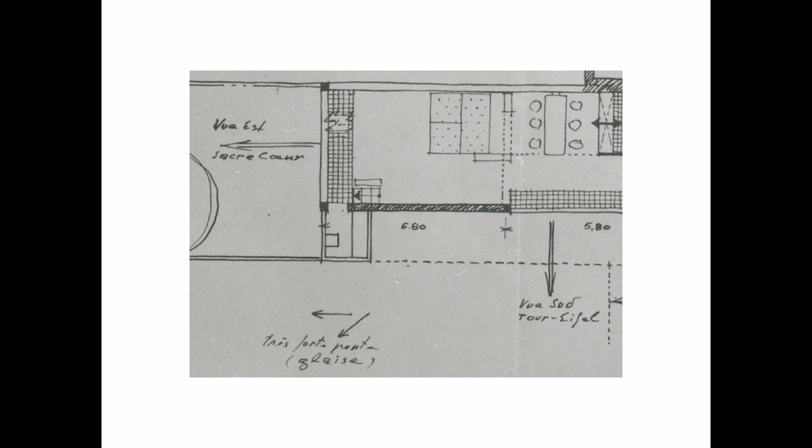The Maison Zilvelli was oriented, as indicated on the simple hand-drawn plan, to two other major Parisian tourist attractions, the Eiffel Tower and Sacré-Cœur, the latter to the left and the former lower right. Both are miles distant from the house and suggest how Jean Welz imaginatively made the most of the long, thin site, perched on the edge of an unstable hill, which was opened for housing in 1927, having the tape cut by Josephine Baker, and where Zilvelli would be built 6 years later in 1933.

The mad hair person at the back is Jean Welz. That short period from 1927 to 33 was effectively the length of Jean Welz's career in Paris. Zilvelli was to be his last major design to be built, the climax, as it were, of a highly intensive period that only began right at the end of 1927, in the December of that year, when he was appointed chef de cabinet, or chief architect, to Raymond Fischer, the architect whose name appears in the local town hall as the architect of the Maison Zilvelli, for the important and generous reason that Welz was not registered as an architect in France and worked on the black, as what Fischer called a nègre viennois, a ghostwriter.

That fact accounts in part for Welz's anonymity, which only really came home to me when I met up in Paris with the expert in interwar Austrian and German modernism, the late Iris Meder, who had written on every nook and cranny of the architects of the interwar period, but knew nothing of Jean Welz and was simply, quote, amazed, unquote, by Zilvelli and his other key houses, and simply couldn't understand how she had not really come across him before. I'm afraid I'd stolen her researcher's dream.

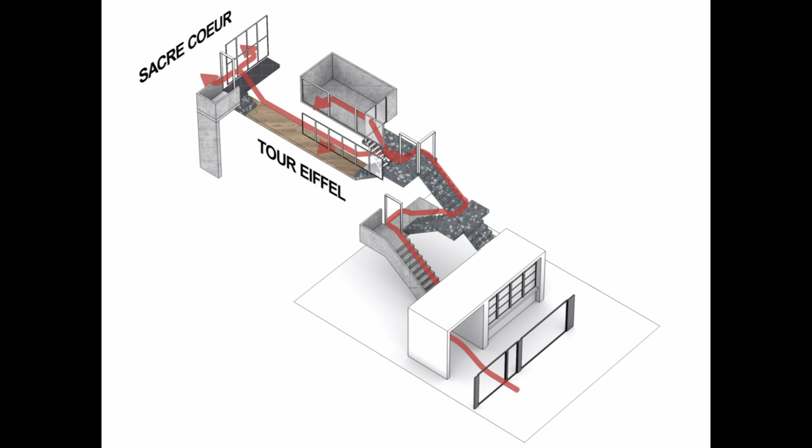But Welz arguably succeeded in taking these principles further than the master, in the banishing of ornament and the creation of a highly varied promenade architecturale, as Le Corbusier called the path from the street to the roof of a house, and which Raymond Fischer called Le Chemin Aérien, or the aerial way, his translation from visiting Loos's architectural school in the early 1920s in Vienna, his translation of what would be later christened the Raumplan. Now, Fischer's version seems to be a more appropriately visual term for the winding path Welz created in Zilvelli, a theme he had taken up with a vengeance in his first house for Fischer, the Maison Dubin of 1927-8, a house literally joined on to one of the classics of modernism, the Maison Cook, in which Le Corbusier announced the 5 points of modern architecture that would become the commandments of young architects for generations to come.

Imagine Jean Welz, aged 27, being given his first opportunity to design a modern house. He had designed a traditional house for Josef Hoffmann, who was his professor and then his employer from October 1918 to September 1925. But this design was to be alongside Le Corbusier's house, itself flanked by a Mallet-Stevens house. Welz had worked for Mallet-Stevens briefly in 1925. And this was indeed a remarkable terrace of just 3 houses just beyond the walls of Paris. So Welz visited Corbusier to ask if he wished him to carry on the roofline established by the Maison Cook. Corbu told the young Welz it was his design and he should do as he liked. Welz rather took that advice to heart.

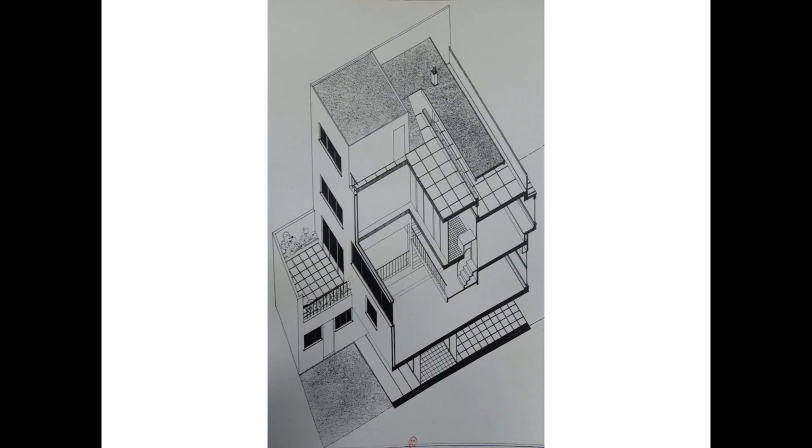In the Maison Dubin, I believe that Jean Welz began a quite remarkable journey in which he brought the full force of Vienna to bear upon modernist Paris, in what I see as a rigorous campaign opposing the 5 points, with an exploration and development of the contrasting and opposing ideas of Adolf Loos. Where the contemporaneous Villa Moller by Loos had 6 levels, a late version of Loos's cubism in moving rooms up and down within the outer 4 walls, depending on their significance, and linked by short flights of steps, the 3 steps up, 3 steps down of Loos, the Maison Dubin had 9 levels and 15 rooms, compared to the 3 levels and 6 rooms of the Maison Cook next door. In Welz's first modern design, he went Loos with a vengeance.

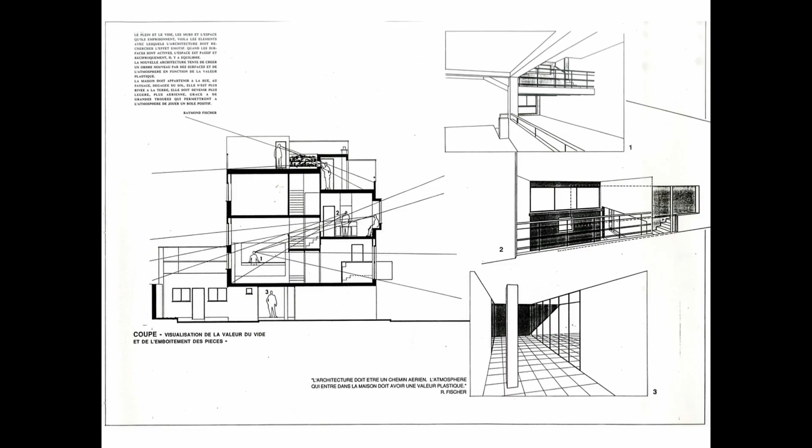Raymond Fischer was so impressed by Jean Welz, to whom he was probably introduced by Adolf Loos himself, that he gave Welz a signed photo, thanking him for his collaboration on the design. The Maison Dubin has none of the 5 points, barring a roof terrace, in fact 3 roof terraces, outdoing Corbusier even on the roof. The small cubic balcony on the front facade, Welz told his son, was a theme as in music, which he repeated and varied throughout the house.

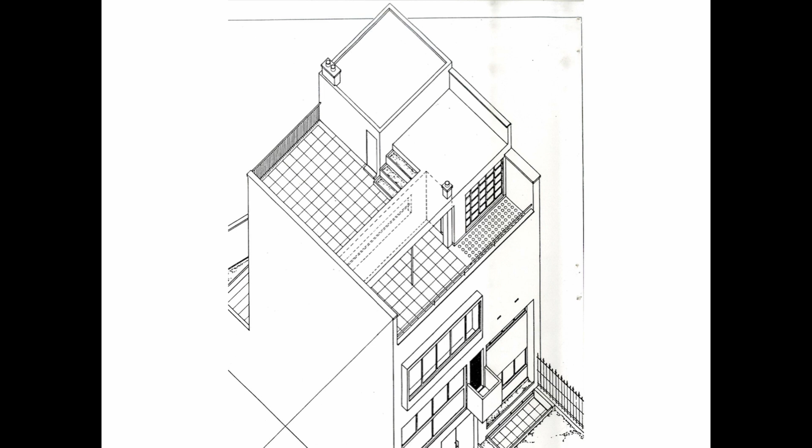Now, little or nothing has been written about the Maison Dubin, perhaps because the small Paris avant-garde knew or suspected that Raymond Fischer was not the real designer, despite the plaque still in the street outside that credits him. And Fischer knew everyone and was a founding patron of L'Architecture d'Aujourd'hui, the house magazine of the Paris modernists. His reputation as an architect was not too high among the cognoscenti, but it would not have been quite on to discuss Welz, the backroom boy, embarrassing for Fischer, and Welz was on the black and illegal, as it were.

Between the Maison Dubin, completed in 1928, and Welz's 2 major houses of 1932, this is the Villa Darmstädter, and 1933, Maison Zilvelli, there were over 20 projects Welz completed. But first, I will draw your attention to 2 more houses, 1 block of flats and 2 big unbuilt projects that pre-date 1933. The 2 houses are both dated 1929.

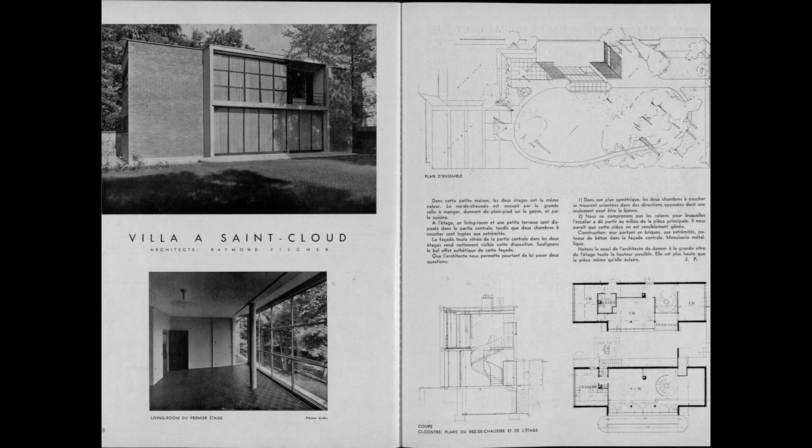First, the Villa Kolper was described as a medium-price house on a more modest budget than the Maison Dubin discussed just now, but showing a continuity with Dubin, although it's an insert between brick or stone houses. The first floor long window combines that Corbusian feature with an interior on 2 levels, à la Loos, an ingenious combination behind 1 window and combined internally with steel pillars to devise an open plan floor.

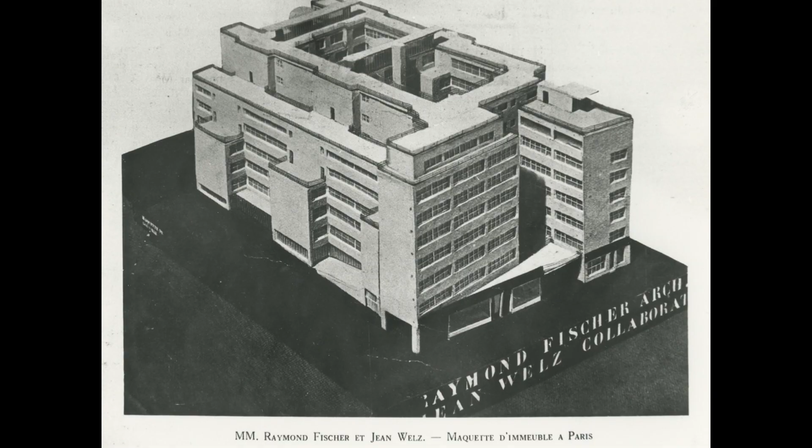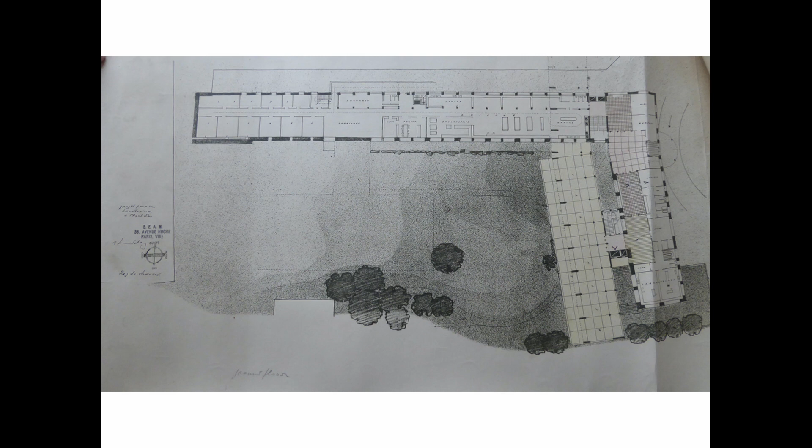Welz must have worked quite some time on the project, as the floor plans are properly detailed for both a typical floor and the ground floor layout. The exterior, to my eyes, stands up rather well to any comparison with the Aalto building and argues for Welz's ability with much larger projects than the single house.

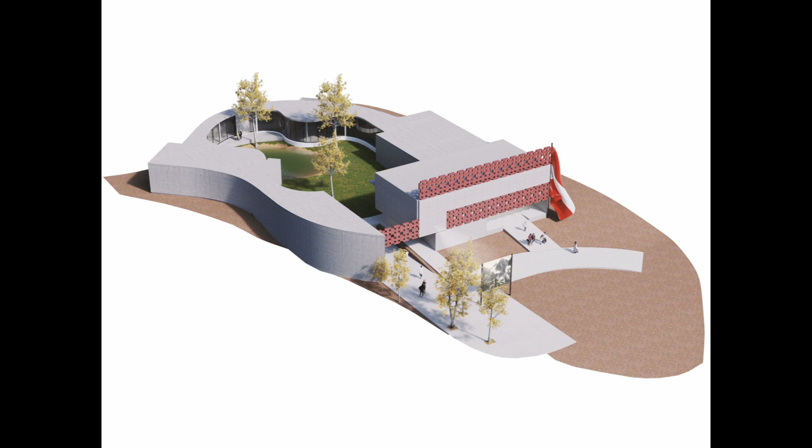The second large unbuilt project was Welz's entry for the 1937 Paris exhibition, the Austrian Pavilion proposal. On a relatively tight site, Welz created a very varied path that rises and falls in levels and turns around 180 degrees to return to the street of entry. This may have in fact been Welz's final attempt to remain in Paris, but as an unknown quantity with zero political backing in Vienna, it wasn't even shortlisted.

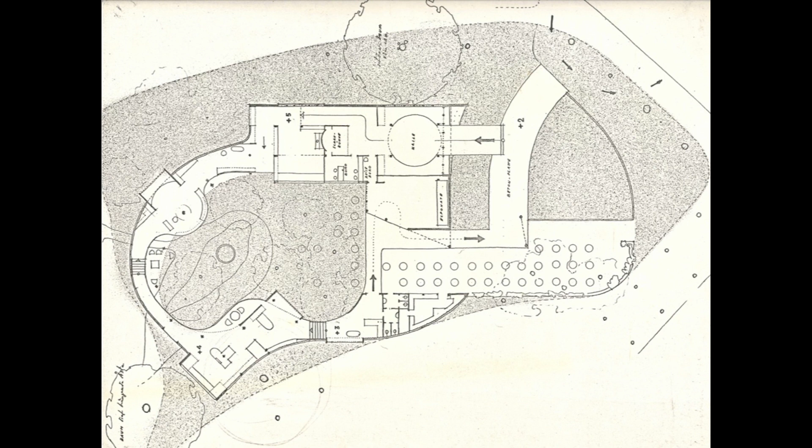None of that was Loos. It was all Jean Welz. And here his campaign against the 5 points reached a climax. Close inspection reveals that none of the 5 go without contradiction at Zilvelli.

If great art strips away, here I feel that Welz harnessed perhaps the greatest name in the history of architecture, Andrea Palladio, to create a new set of conditions upon which a modern architecture could evolve, in contrast with Corbusier's 5 points. It outdoes Palladio in the purity of the 2 flanking brick planes and in the picture frame stroke portico of the central area, with the loggia overlooking the garden and the full height glazing of the ground floor doors onto the terrace and garden behind.

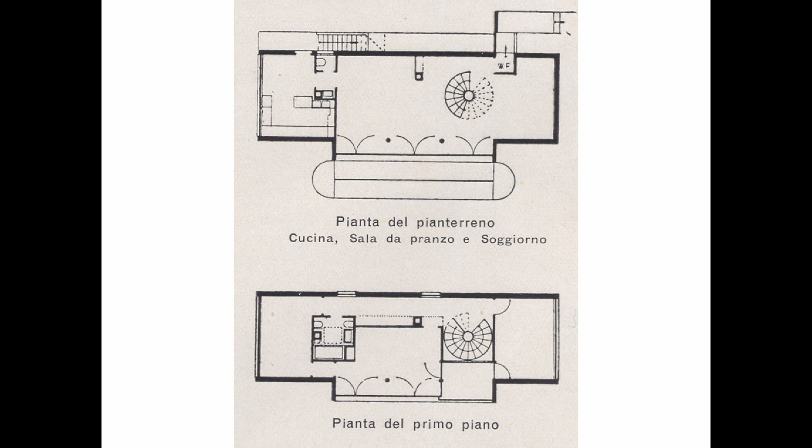But if there were to have been opening doors, the room may not have been intended to be a bedroom as it became, but possibly an open loggia overlooking the garden below. That rang bells in relation to Palladio, and a couple of his houses of the second decade with a similar feature. Here, the Villa Pisani, a portico two floors high, with an open loggia on the upper floor, in both cases rear elevations looking onto the garden.

I also rather later visited the Queen's House at Greenwich on the River Thames, the very morning it reopened for visitors in 2020. Designed by Inigo Jones and begun in 1616. Jones was a huge fan of Palladio. His copy of the Four Books of Architecture was heavily annotated, and he had gone to the extent of searching out Palladio's assistant some years after the great man's death.

It too had a rear elevation with a similar feature, the upper floor loggia overlooking a garden, in this case extending up the hill towards the Greenwich Observatory, thus providing a splendid view of the rising landscape. Inigo Jones's house was not completed until 1636, but he was credited with bringing in the Renaissance to England as a pioneer almost 300 years before the Villa Darmstädter.

This vertiginous sense of the history of architecture, extending from ancient Rome, whose architects had plundered ancient Greek architecture, to Palladio's plundering of Roman ruins in the mid-16th century, to Inigo Jones almost a century later, shooting forward to the modest but sublime Villa Darmstädter a further 300 years later, was a quite marvellous panorama to contemplate. However, I cannot claim to have anything approaching conclusive scholarship to seal such a panorama, as it were, in stone.